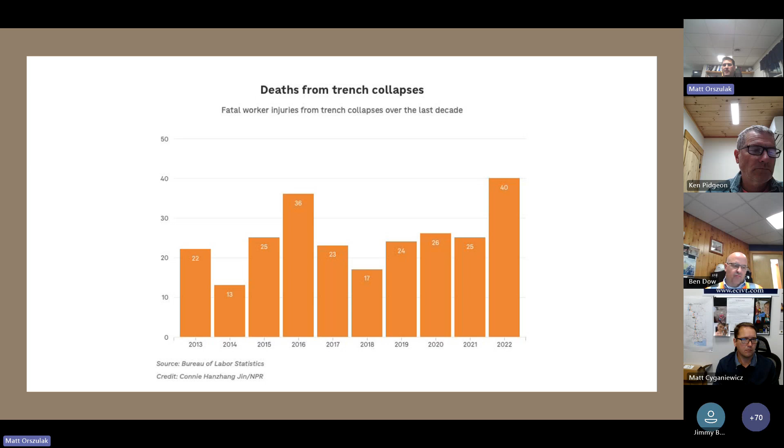A cubic yard of material is roughly a small compact car, roughly 2,000 pounds. So it's something that we can't take lightly. I know sometimes we could get complacent because we're in these trenches all the time, but the weight of soil is real, and if a cave-in occurs, it gets real fast. So think of it as a grave. You're entering a grave, and you want that grave to be shored or protected, so you're safe and sound each and every time you're in any excavation or trench.

So I kind of just wanted to show some photos the rest of the presentation, and maybe have a little open discussion if someone feels comfortable turning on their mic and jumping in and kind of playing a little dance with me.

So is this safe? You see this? Does everybody see this kind of line right here in this excavation? Would this be safe to enter? Pretty easy one, right? Just for getting the conversation started.

No, it's very dangerous, and that's why it's important that we don't put our spoil piles within 2 feet of a trench excavation edge, so we can identify this cracking that you see here. So we want to make sure that all foremen in our civil and heavy civil or in trenchless, pretty much all foremen are doing those daily inspections. That's the importance of that JHA, identifying your excavations, selecting the best practices that we identified in the JHA. So we're checking that box that we're doing those inspections, we've got the competent person on site, we're meeting the standard, and we're pre-planning our excavations ahead of time.

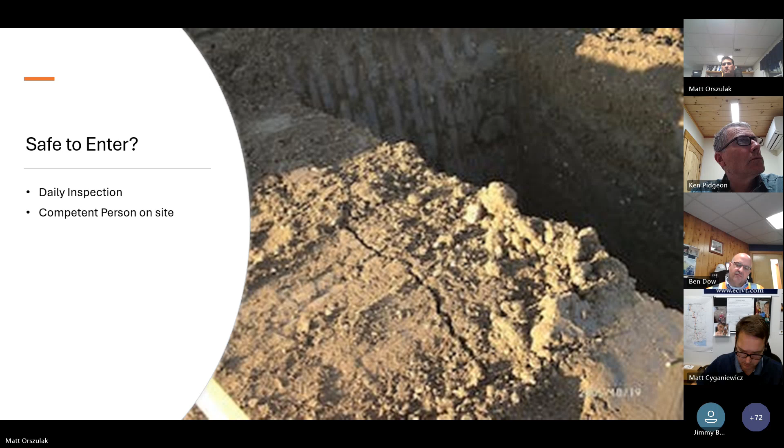So is this one safe? What do we got wrong here, right? We got guys outside of the box, probably like an 8-foot vertical trench line. I don't know where this is or the type of soil, but again, this is just bad practice, unsafe behavior at its finest.

So what's wrong with this one? There's no protection, no means of egress, right? Remember, we got to have proper means of egress at 4 feet, which can be an earthen ramp. Historically, in most trench work, it's all ladders. Make sure that ladder stands 3 feet above the landing, and within 25 feet of the employee in the trench line.

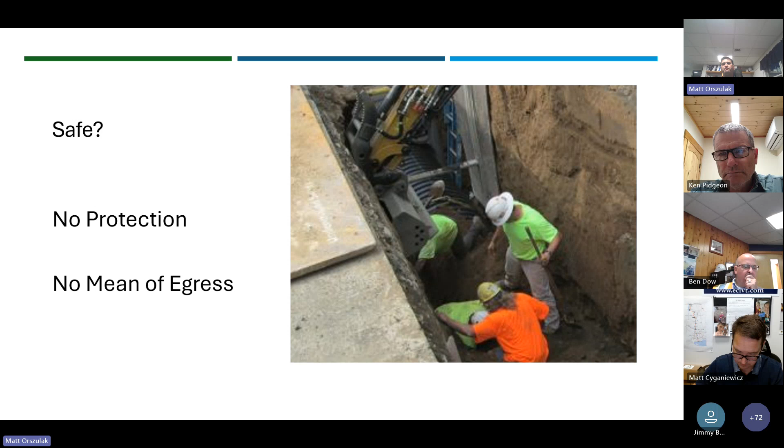So this one, this is kind of common, but is it safe? Yeah, probably is kind of safe. Is it compliant though? The answer to that one is no. Our spoil piles are within 2 feet. We don't have proper freeboard. Remember, our trench boxes - from the toe of slope above the box needs to be 18 inches of freeboard. And then there needs to be proper sloping above the box, which is really hard to tell in this photo, but for the purpose of training and raising awareness, I wanted to add that one to this photo.

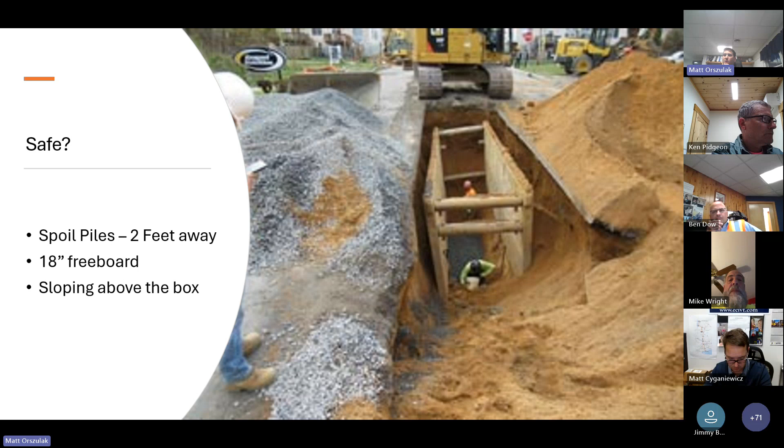So those are all kind of the best practices with trench boxes. Again, we don't want to float our spoil box more than 2 feet. We don't have to. Should have had a ladder in there too. Yep, and a ladder. Excellent. Thanks for jumping in, whoever did that.

And I wanted to highlight the things that we're good at. This was a couple weeks ago up on Notch Road in Bolton. It's Randy and crew, Richie Munson. Granted, it's not super deep, but still proper slopes, easy means of egress. They cut an earthen ramp. It's hard to see kind of where I was standing, but you could easily walk in and out of this thing right by the excavator on both sides.

A well sloped, well thought out plan. They did a JHA ahead of time. They identified their hazards. They knew they were going to slope. Their means of egress was an earthen ramp. Best practices were being performed, and it was a good plan done ahead of time, and they executed it. It was really nice to see.

And this was just this week in Richmond, my site visit this week. You got a registered professional design protection plan here for trenching. You got our sheets, tiebacks, a really nice slope done by the team in this back wall, easy earthen ramp that you see on the right side of the head wall that was poured in place. So it was a really well thought out, well executed excavation and trenching done by us.

And I can't emphasize the point of pre-planning, knowing the tops of your slopes if you're going to do a sloping for precast or cast-in-place concrete footers or stuff like that. And if we're doing water, any utility work, trench line work, let's just use boxes. Plan ahead, use the box, get the right piece of machine that can handle those boxes. It makes our lives a lot easier when we pre-plan and have a good game plan ahead of time when we're doing any trenching work.

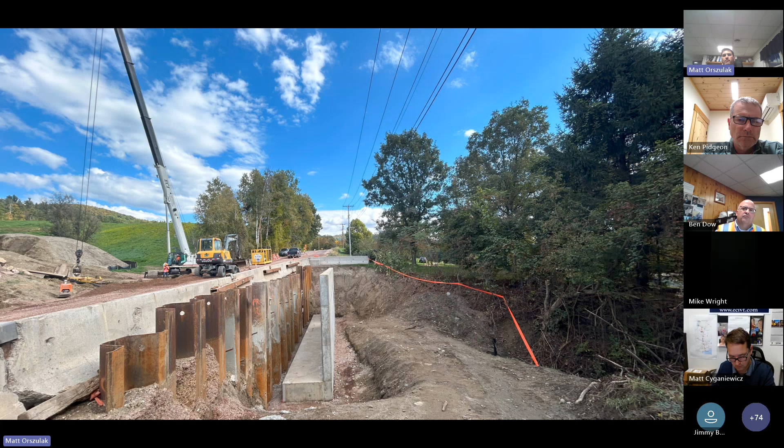So VOSHA's website, their compliance officers are hitting this hard. We're seeing it in the state of Vermont. Any excavation or trench that a compliance officer sees is supposed to stop and do an inspection. So let's really make sure that we slope it, shore it, shield it. Anything deeper than 5 feet, we got to be doing it. And if we're not, we need to be correcting it right away.

Anything to add, Ken, Ben, anybody else out there? Yeah, I got a comment. The 18 inches of freeboard is applicable when you're sloping down from existing grade. If you had a box right at grade, say a road surface, you don't have to extend it up 18 inches there. It's only when you do a pre-cut down into the ground. Yep, that is correct. Also, I think maybe when you have a pile next to it.

I think the idea is that you don't want stuff tumbling down exactly into the trench. So as long as you take measures to make sure that if you're at grade, you have it far enough away, and possibly a gap, so that debris falls in before it tumbles into the trench.

Exactly. One of the common ones I see is if they're using a trench box laying pipe, a lot of times they'll have too small of a machine, and they'll have a very steep slope on the machine end where they're working on the pipe, with an almost vertical wall right at the end of the trench box where they're unprotected. So make sure you have enough machine to slope that out too.

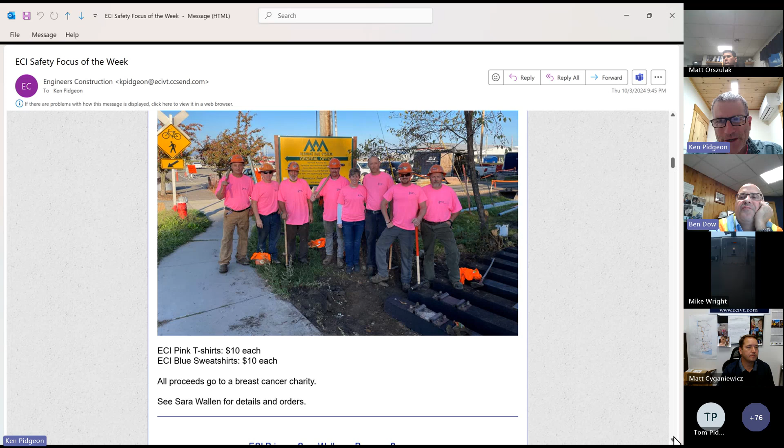Let's define a couple things. The primary care wellness program is more of a long-term practice, trying to get yourself into a good wellness mood and mode. The EAP is more of a crisis sort of thing. When you're in more of a crisis, you could call up the primary care wellness provider, Champlain Medical, but the EAP is available 24/7, and it's free and confidential, just like the other one, but they're a little bit different. Just wanted to let you know.

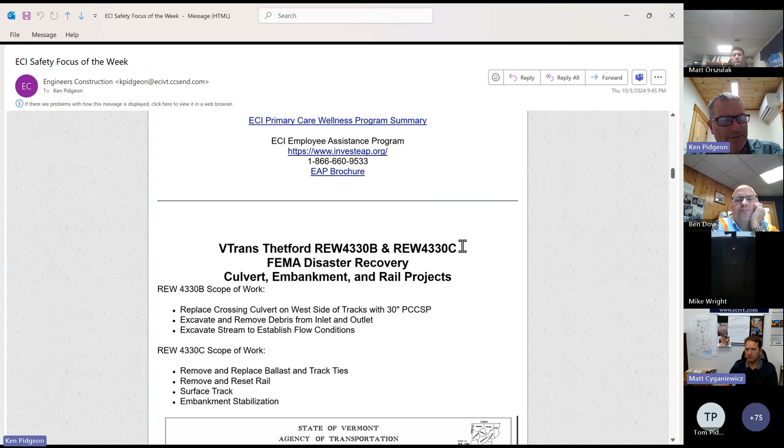And I assume Matt Cyganiewicz is out there. I'm out here. All right, you want to drive, or you want to let me drive? You can drive. Okay, I'll drive. I'll scroll down a little bit, or scroll it up, whatever you want. Go ahead.

Engineers Construction was contracted with VTrans to do a project in Thetford, Vermont, in Orange County, on the Washington County Railroad, down on Route 5 near the Connecticut River.

The project was split into two scopes of work. The B scope was replacement of a culvert with a 30-inch poly-coated steel culvert, plus new rail and ballast improvements, and excavating the stream to make it flow a lot better. There was a lot of debris and silt in there that needed to be taken out to clean it up.

The C scope was a washout. This is a FEMA-funded project. It was a washout, so there was embankment stabilization, and again some new ties and resurfacing to go along with it.

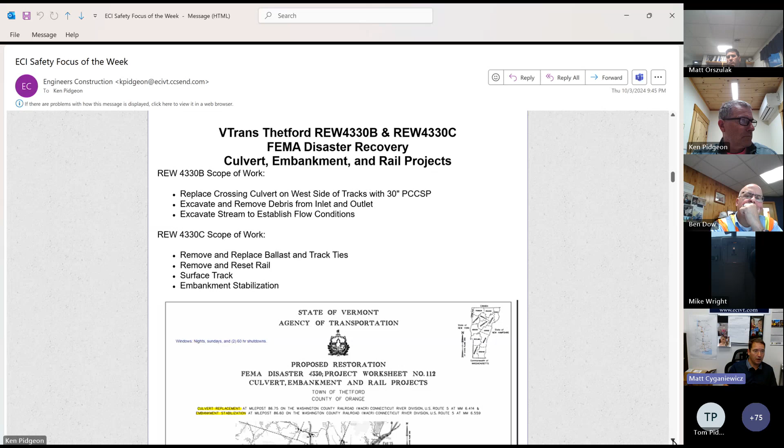You want to scroll down a little bit more, we can show the area. We're very close, and in some of the pictures you can see we're very close to the Connecticut River.

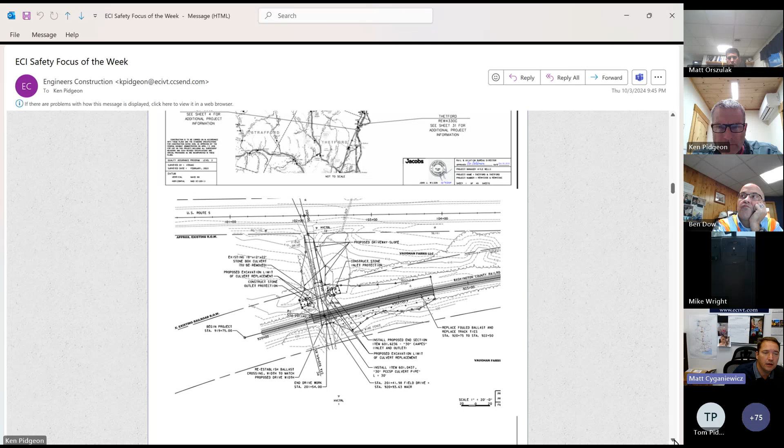The first portion of the project, the B portion, was replacing the culvert. Route 5 is at the top, and there's a farm crossing for someone to get over into a cornfield next to the Connecticut River, and it crosses the rail. So keeping that culvert flowing well and the road stabilized was important.

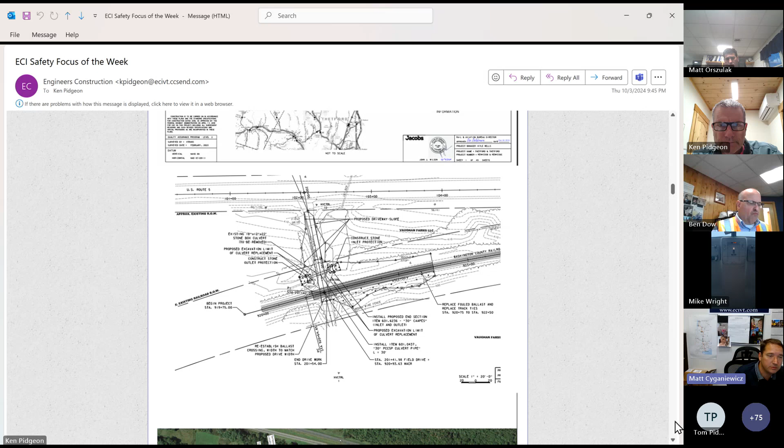There was an existing stone culvert there. We took that out, excavated it, put in the new 30-inch poly-coated culvert, and rebuilt it up from there. We used some Type 2 stone for the inlet and outlet portions of the culvert to help with erosion and cleaning debris out before it goes through the culvert itself.

The space was limited since it's a railroad, so you have to work within the railroad right-of-way area. So we had a good idea to use traffic signals to utilize a lane during the whole project on Route 5. Here's a portion of the traffic control plan utilizing the traffic signals, and it worked out great. We had a whole lane to park trucks and bring in material. It was a good piece of the project that we were able to use with no permits or anything like that. It worked out really well.

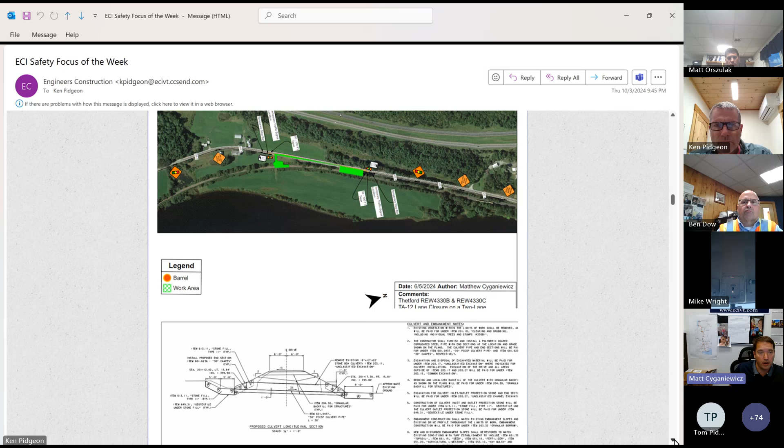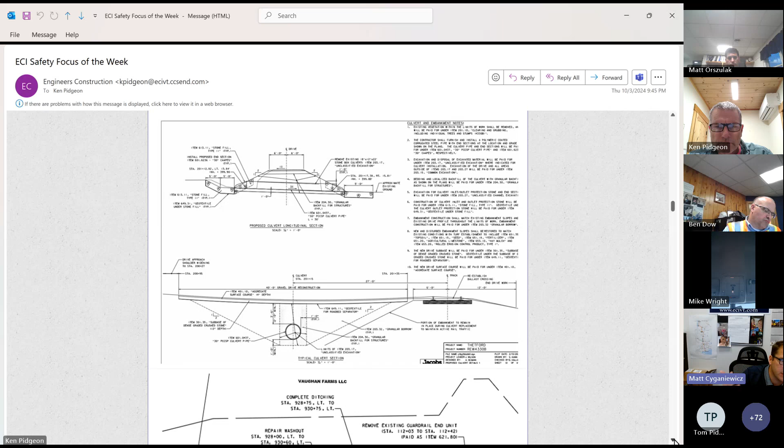Here are some cross sections of the culvert. The culvert wasn't very deep, roughly 7 feet to the bottom. We excavated an additional foot to get the granular backfill underneath, then worked our way back up, basically backfilling back up to the farm crossing grade, and we were done.

On this portion of the culvert project, we did replace 120 ties. We resurfaced and aligned tracks about 375 feet, somewhere around there, and then replaced the ballast. And the pictures that'll come up will really show how it turned out.

Where Ken has it right now is the C side of things, where there was a washout with the embankment. So there are some larger trees that the guys removed. We grubbed everything, kind of dug it out to type 3 stone depth, and just stabilized that whole embankment with type 3 stone.

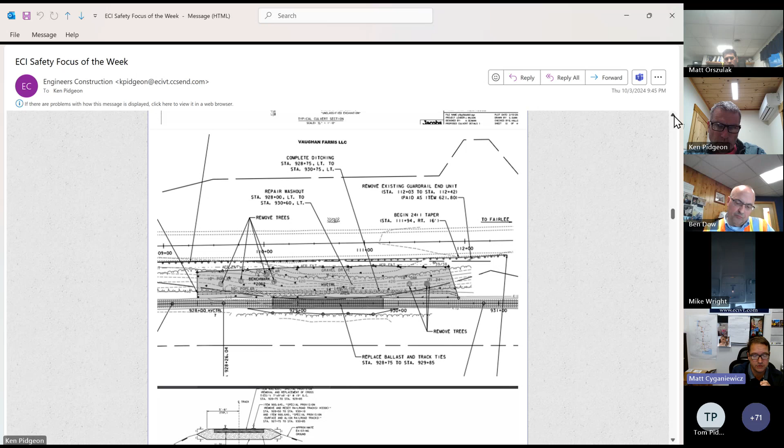On this portion of it, there was some tie replacement. I think this side only had around 75 ties and 310 feet of surface and aligned track with new ballast. I think we're going to show a nice cross section here so you get a good idea, Ken, if you want to scroll down, of what it looks like.

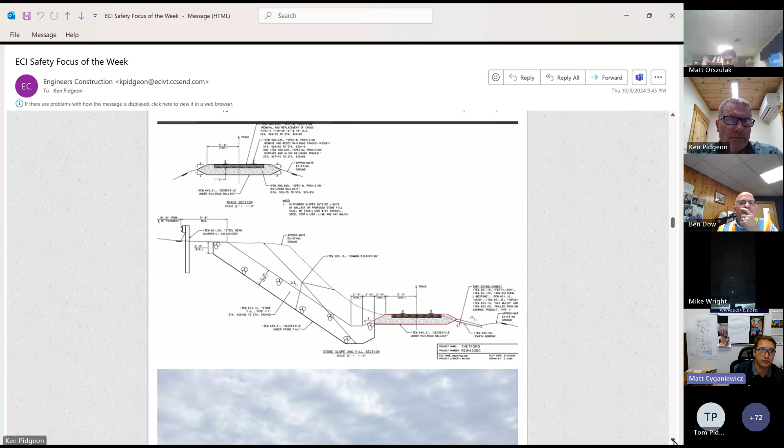So yeah, this area kind of got washed out, so they wanted it stabilized. You can see where the guardrail is up here - that's Route 5 - and then the track section down at the bottom. There was in this area like a pull-off, I don't know if it's for the public or whatever, where people were dumping a lot of trash. You hear about that on the news. VTrans completely took out the turnoff, and then we extended new guardrail through that area, so no one will be pulling in there, dumping their garbage.

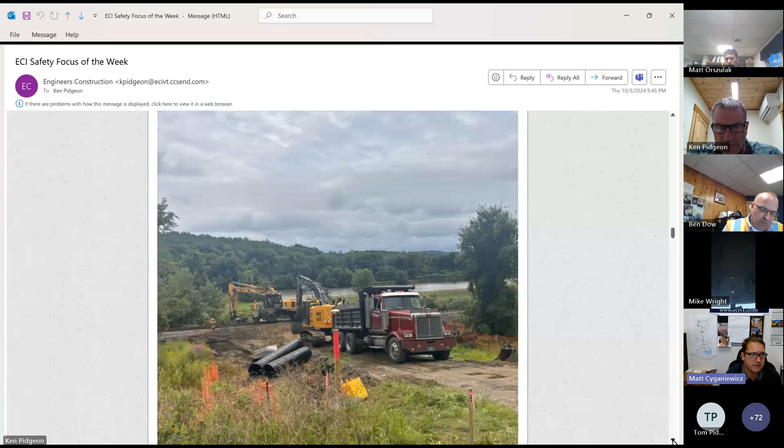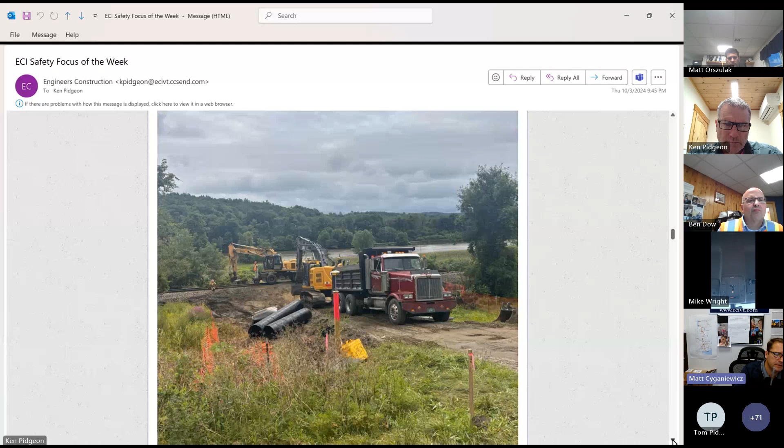So we'll get into some pictures. This is the culvert reconstruction. You can see the 30-inch polyethylene culvert there. It looks like we have the 245 there with GPS, and we dug it down and started to install it. Here are the guys digging it down to get to that foot of granular backfill to set the culvert on.

And when you came into this project, it was just full of brush. You couldn't even see the existing stone culvert that was there. It was a really, really big mess. It really needed to be cleaned out so the stream could flow properly.

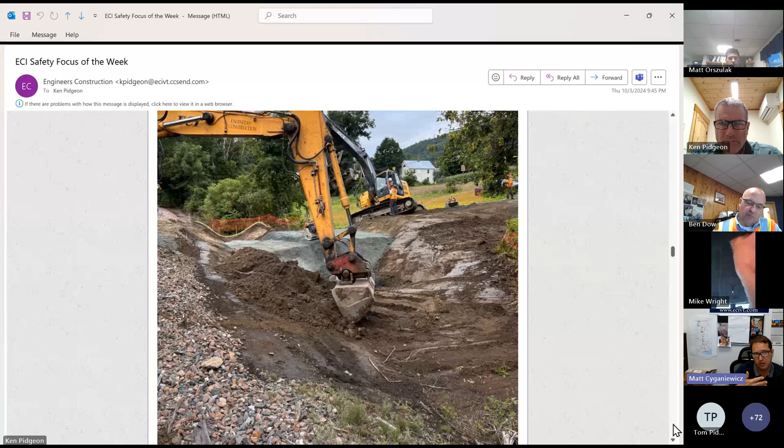Here are the rail crew setting the culvert, and we're controlling water. Luckily, at this time of year, there was very minimal water. It helped us proceed with the culvert without any issues or bypass pumping or anything like that.

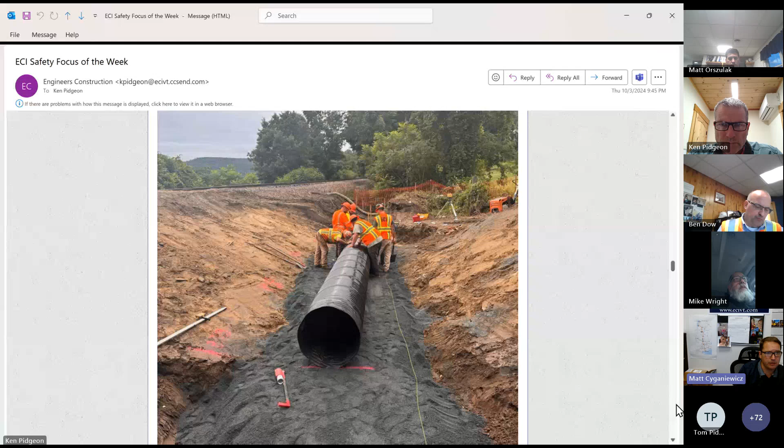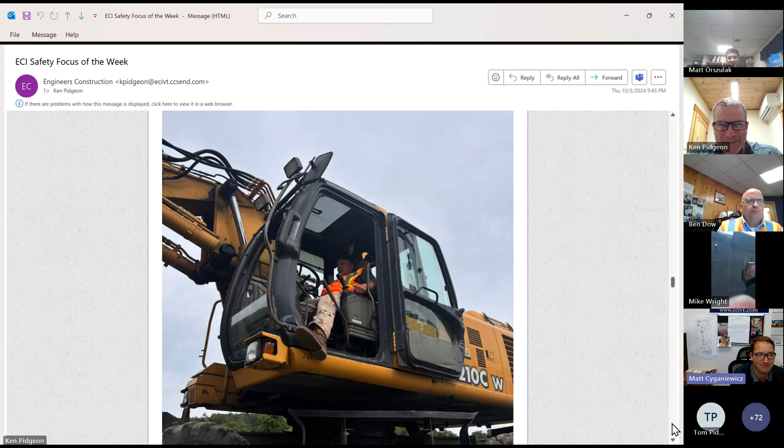This looks like Zebby. I don't think he's sleeping - I think he's just concentrating really well. Yeah, just waiting probably for them to get the pipe together so he could backfill. And he's in the 210 high rail excavator.

Here's Mike Hutchins helping. This is the bank stabilization portion of it. We did a lot of it from Route 5, and you can see to the left, the lane closure there, which really helped us. This was a little challenging, obviously, because there were some low-hanging wires above us, but the guys did really good to maintain spotters and watch everything.

We did have to roll out geotextile for the type 3 stone. We would lay that down first.

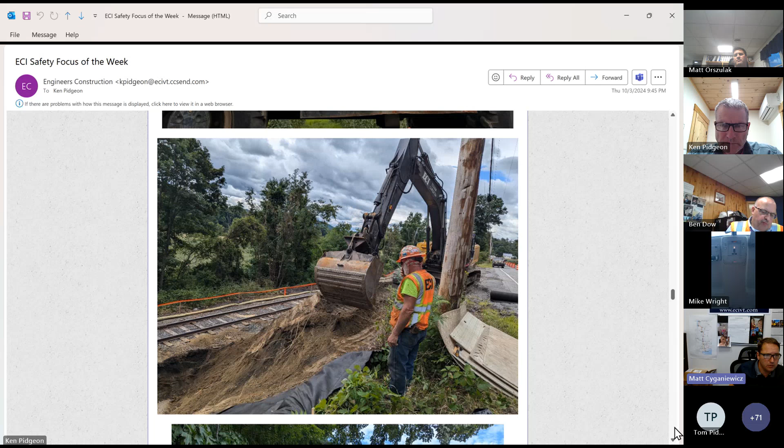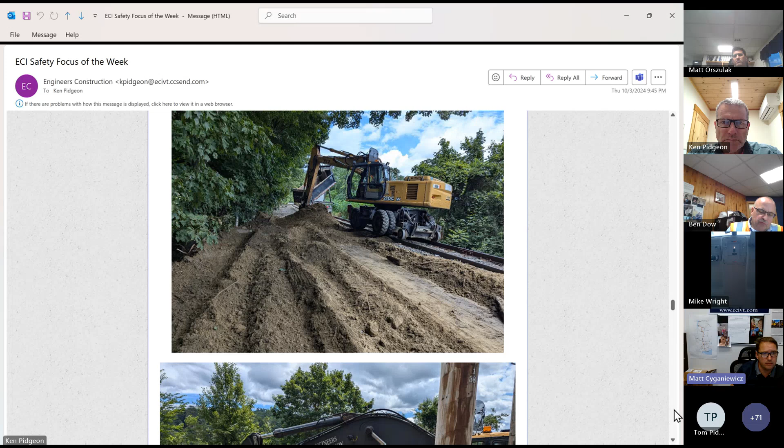And this portion, I think the guys were cleaning up the ditch, so the water would flow down to the new culvert that we put in downstream. I think the stream gets heavier with rain - some of it comes right off the roadway down into this. So it really needed to be done because it had no place to go. It flooded the tracks, silted the tracks and the ballast.

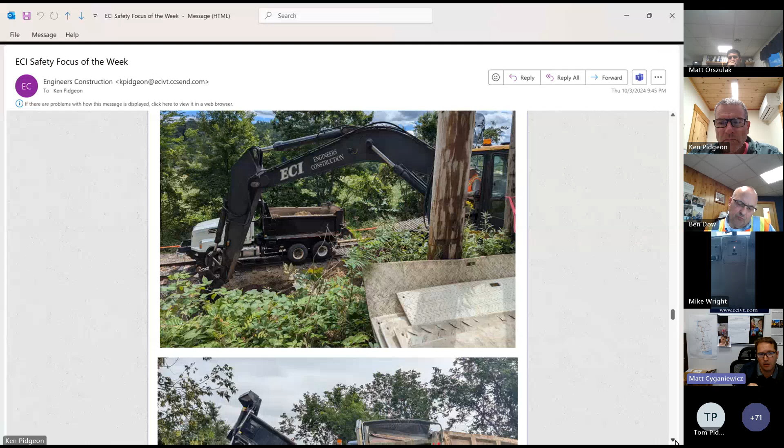Here's another picture of the guys loading out the high rail dump trucks that we used on this project because it was a FEMA project. Thankfully, for once, VTrans gave us a disposal site. They weren't the greatest disposal sites, but we managed to utilize them, and they were right off the rail, so it was easy to do.

And here we are dumping into those sites, getting rid of the waste.

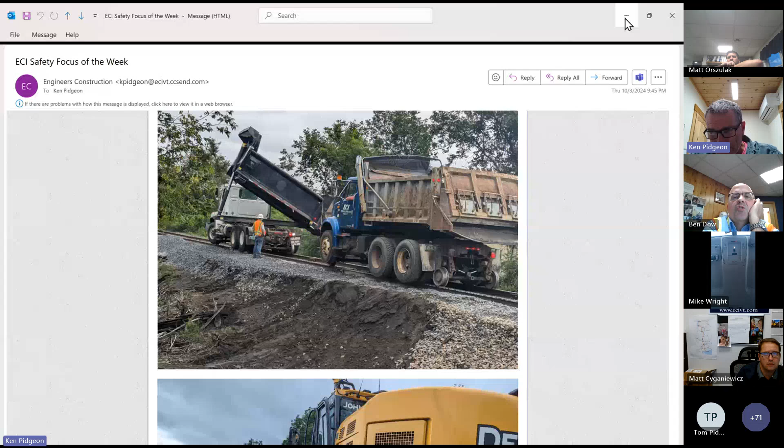Oops. Oh, what happened here? You still see my screen, I assume? Oh yeah, still see it. Yeah, okay, I lost it. This is why I don't drive. There we go.

Here's the 245. You can see down the way there how they cleaned out everything, and some of the new ballast that we put in.

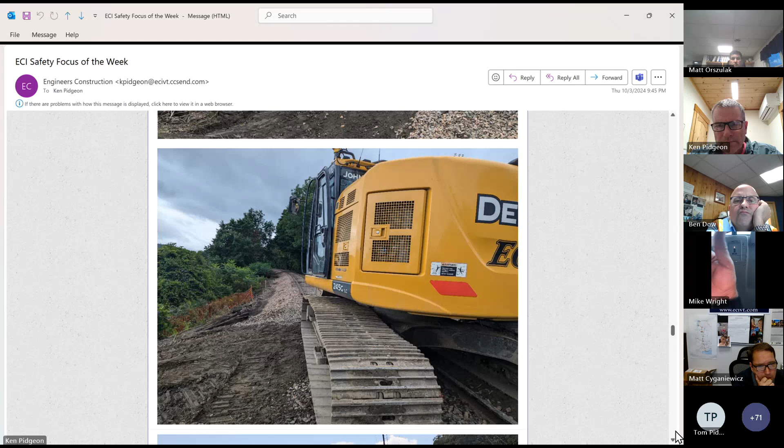This is the bank stabilization, so you can really see where we removed the guardrail, which kind of stopped just before this. And then there was a big area that was all filled with trees and debris and garbage that people were dumping down there, which probably made the bank less stable because it wasn't good material, just garbage and stuff. So we cleaned all that out, cut all the trees, and excavated out all the bad material.

Then here you are - we're placing some really nice type 2 and type 3 stone here. Eventually, once this was completed, we installed the new guardrail all the way down that area so people wouldn't try to use that same spot for conveniently dumping trash.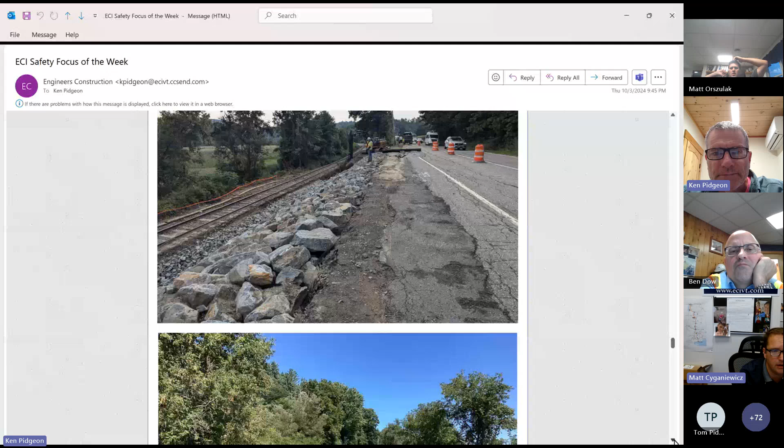Was it covered with topsoil after over that stone fill? We didn't - it wasn't a grubbed type of stone fill, which I actually kind of like. I've heard different opinions about it, but you'll see in some other pictures, this wasn't that type of bank, and I actually like that look better, but this is my personal opinion.

So this is the crossing where we installed the new culvert. This is looking like if you headed that way, you would go to the bank stabilization.

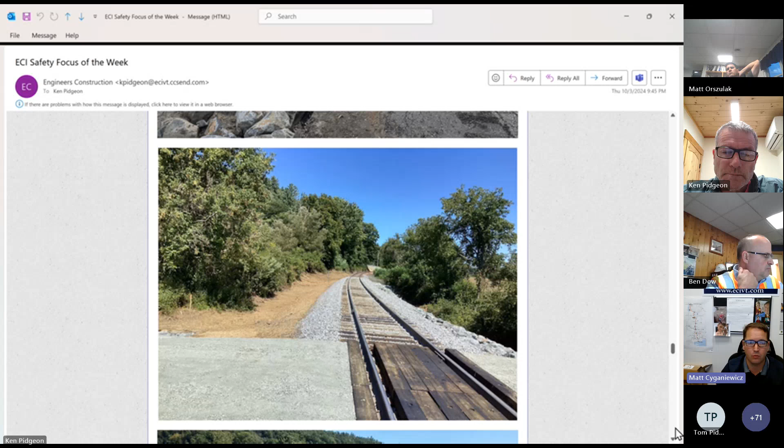Originally, VTrans had the gravel going through the crossing, which would be a maintenance nightmare for the farmer. Probably after the first year, all of that stuff would have been destroyed. Ron and the crew had a great idea about making it a farm-type or wood-type crossing, which is much better and will last so much longer. It came out really well. You can see all the ditching and bringing the grade down to the culvert and the road here. Amazing, beautiful job compared to what it looked like when we got there.

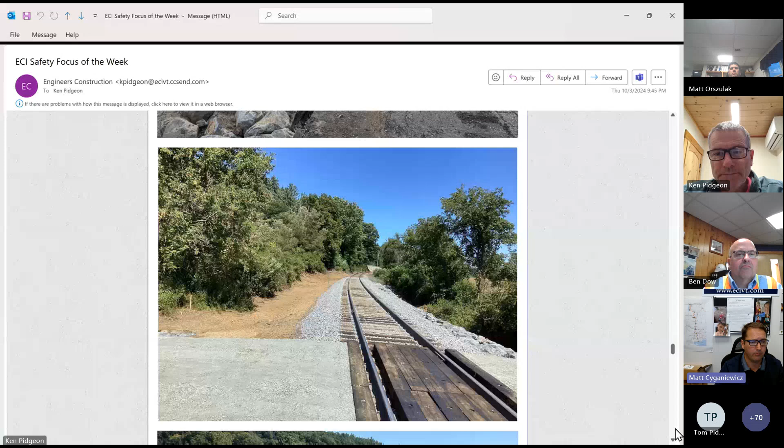Here is looking from Route 5 down to the farm crossing. You can see he has some corn there. The Connecticut River's in the background.

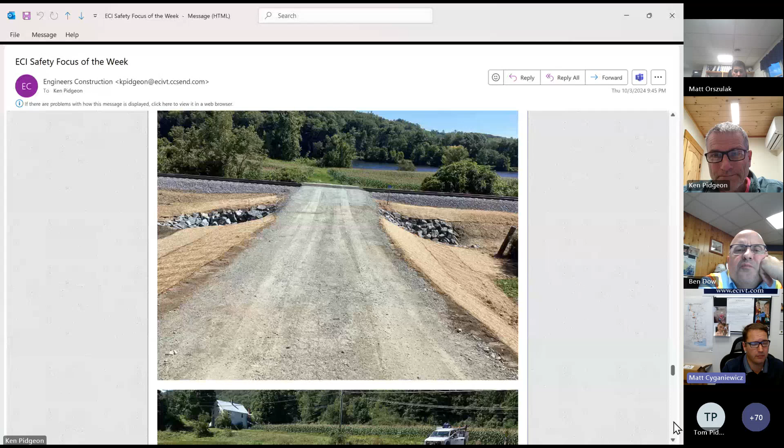We did use, I believe, type 2 stone, a little bit smaller, for the inlet and outlets, which I think works really good because it kind of traps some of the silt before it gets in there. It does erode out the sides, but then with all the matting and seed and stuff — I haven't been down here since the walkthrough, probably 3 or 4 weeks ago, but I know we got a little bit of rain, so I'm sure there's grass coming up everywhere. Looks really good, amazing job with the rail crew.

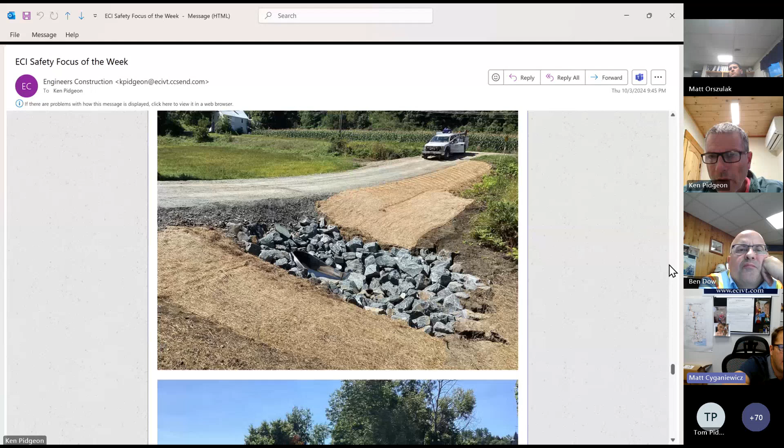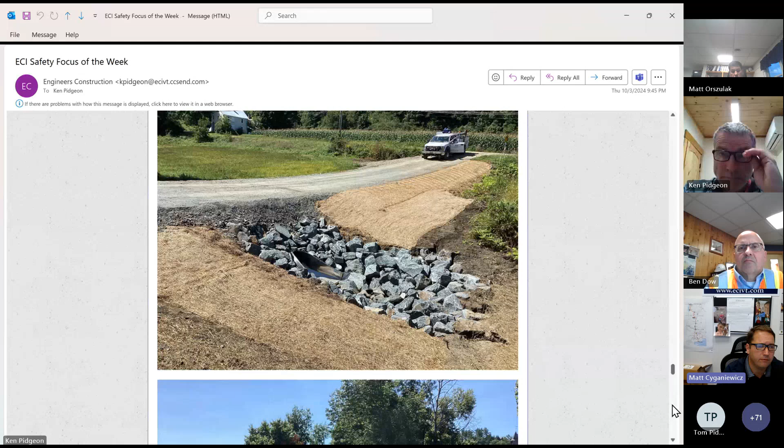Again, where Ron's truck is, that's Route 5 up there. I'm looking back this way — this is the inlet side of it. It was dry, so there's not much water going through at the moment, but I think when it does rain, it comes off Route 5 and will definitely flow through here. Needed to be done.

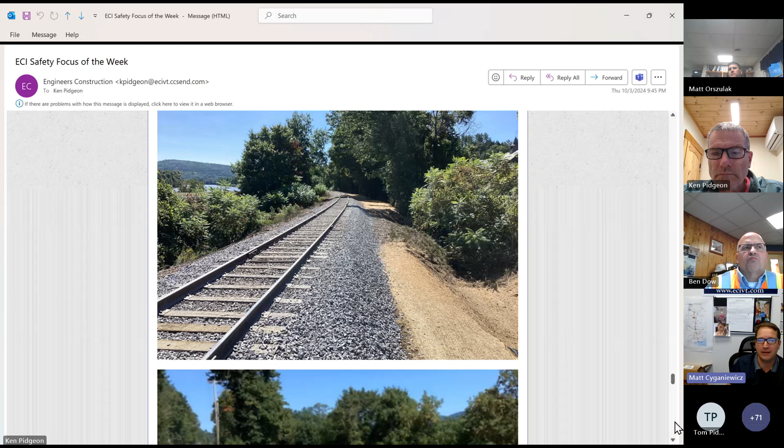Here is a portion of some of the new ballast and resurfacing that we did. Looks great. Looking down, more towards those trees back there, that was one of the fill sites. It's kind of hard to show here, but standing at the farm crossing or walking down there, the guys did a really amazing job getting that fill to look nice, grading it out, matting it, and seeding it. I made a joke while I was there — I said it looks like a nice little picnic area down there. That's how nice it looked.

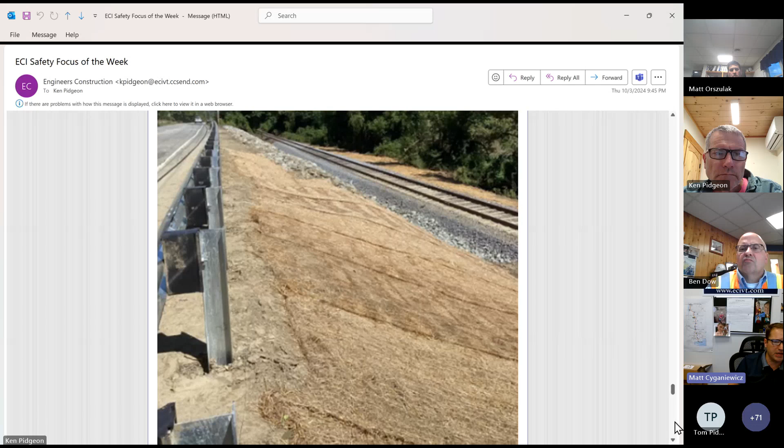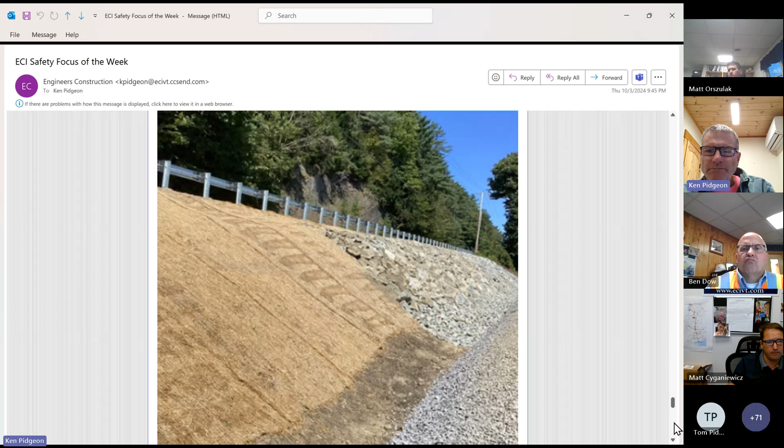This is a track view of that same picture. Really clean, really good job — the rail guys do great work. It looks great, oh my God. These pictures look good, but being on site really does it justice. So this is a good job.

Thank you very much, Matt, for presenting. No problem, my pleasure, my job. Great pictures too — I like to emphasize pictures, right?

Yeah, and that was a collaboration of pictures. A lot of the guys take their own, and I try to get those because some of them are right in the work, doing the job, and they take that picture and it really comes out well. They find the right moment to capture the essence of the job — better than me rolling in there just taking a few pictures. They're right there doing the work while taking the pictures.

So for the photo archives, we have the Verizon Wireless Cell Tower Foundation in Thetford, up in the hills of Thetford, back in June 2006. So it's very likely that this tower was transmitting and receiving the signal from Ron's cell phone when Matt called. Nice.